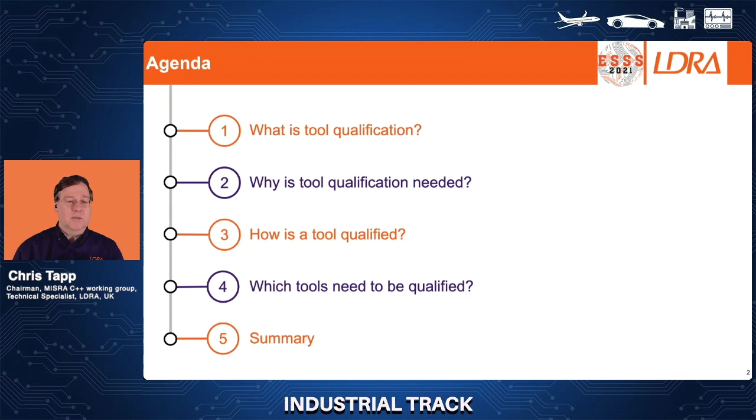So the first thing to understand is, what is tool qualification? Well, basically it is a process that's used to ensure that a tool is capable of doing the job that it claims to be able to do. In other words, it has to be at least as good as the manual processes that it will eliminate, reduce, or automate. The essence of tool qualification is really a process by which a user proves that the tools they are using are capable of properly performing its tasks.

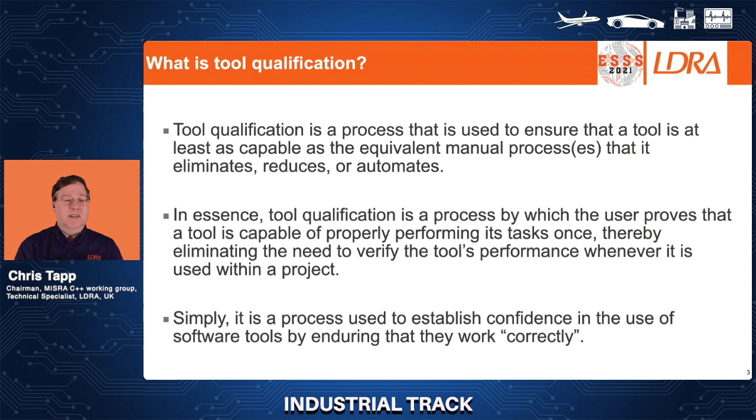The idea is that you do this once, which means you then do not need to verify the tool's performance whenever it's used within the project. So you do it once at the start of a project, and then you can assume that it is behaving as expected for the duration of the project. More simply, it's a process used to establish confidence in the use of the software tool by making sure that they work correctly or as they are expected to work.

So why do we need tool qualification? Well, really, it's needed for any project where software failure could have some serious consequences. That may be risk to life, financial consequences, or even just the reputation of a company. If you're producing a product that's widely circulated, you want to make sure that your name is seen in a good light. Some examples of this are within power generation, power distribution, machine control systems, building infrastructure, possibly something at the top of a building, a large mass used to maintain building stability in earthquakes, or some other project that has a high safety requirement associated with it.

It might also be necessary for development of systems that are not directly related to a product. For example, you may have a system used to program a medical device within a manufacturing facility. That also needs to be developed to an appropriate safety integrity level, at least as high as that of the product itself. You don't want to end up with a device having the wrong firmware in it, or having inappropriate calibration data loaded in it during manufacturing.

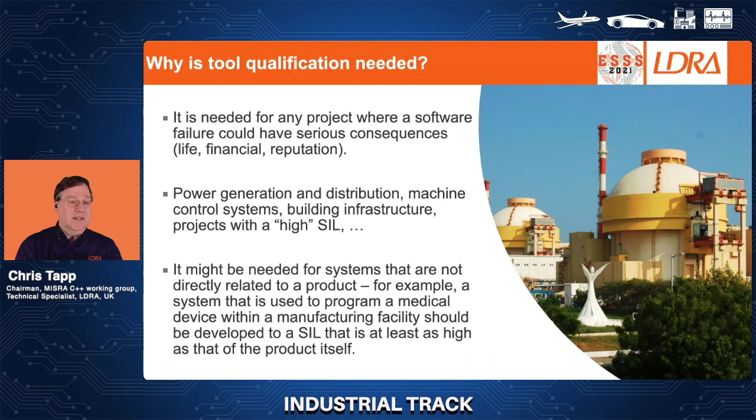So how are tools qualified? Well, as with most other things within high integrity software development, it is related to a process. And the process typically involves three phases.

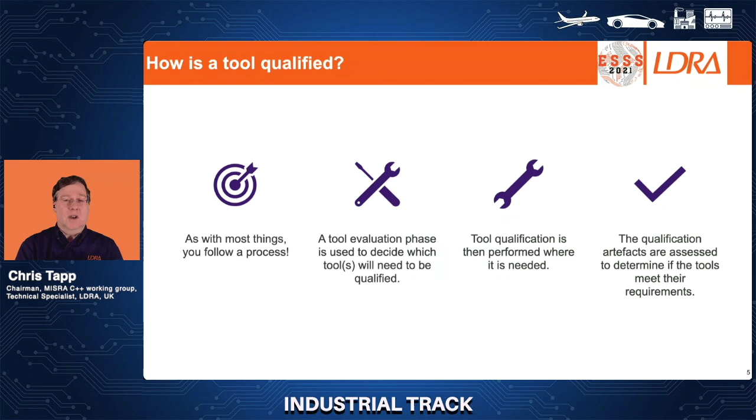First, a tool evaluation phase, used to decide which of the tools within your project need to be qualified. Then it moves on to a phase where the tools themselves are actually qualified, where the performance is measured and confirmed to be as needed. And there is also a review of the qualification artifacts produced during the process, where these are assessed to make sure that the tools are actually behaving as expected and that they are not going to compromise the project in any way.

So the process starts off with this tool evaluation phase, and the intent of this is to get an understanding of the tools and how they work within the development environment, and to see if there are any concerns that may be raised by their use.

So we start off by understanding what the intended purpose is. Why is the tool being used within the project? What's its purpose? We also look at the inputs and outputs of the tool. For example, it may be taking source code and producing reports, or it may be producing data files. So we need to understand what the workflow is associated with the tool.

And we also need to look at the environmental and functional constraints. In other words, where is the tool being used? How is it being used? And are there any restrictions that must be observed when the tool is being used for it to behave as expected.

The aim of this is really to evaluate the tools to decide if there is any possibility of them introducing errors into the software, or for them failing to detect errors that may be in the software that they are reasonably expected to detect and point out to the developers.

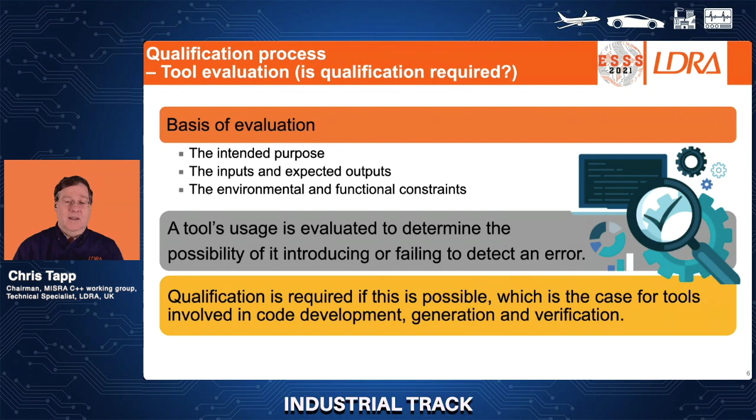Qualification is going to be required if there is a chance of any tool detecting, failing to detect an error, or introducing errors into the software itself. That's generally going to be true for tools involved in code development, any tools used for generation of code such as automatic code generation or compilers, and also any verification tools used to ensure that the product is meeting its functional and non-functional requirements.

Looking at the tool evaluation itself, there is a set of information that has to be collected to allow a tool to be evaluated, and that will include a use plan. In other words, how is the tool going to be used in the project? Do we understand how it's going to be configured? Do we understand the use cases that the tool will be applied to? And do all the developers understand how to use and run the tool on the data files that need to be checked or processed?

We also need to build up a list of the features, functions, and properties that are going to be used. In other words, we may have a tool with a lot more functionality than is needed within the project, so we need to understand which bits we are going to use and which we aren't, because there's no point in qualifying aspects of a tool if they aren't going to be used within the project itself.

It also helps if you can obtain a list of any known defects and workarounds that may exist within the tool. It's quite common for development tools to have some known issues, and the vendors will often publish a set of guidelines that say if you follow these guidelines, you will not run into these problems.

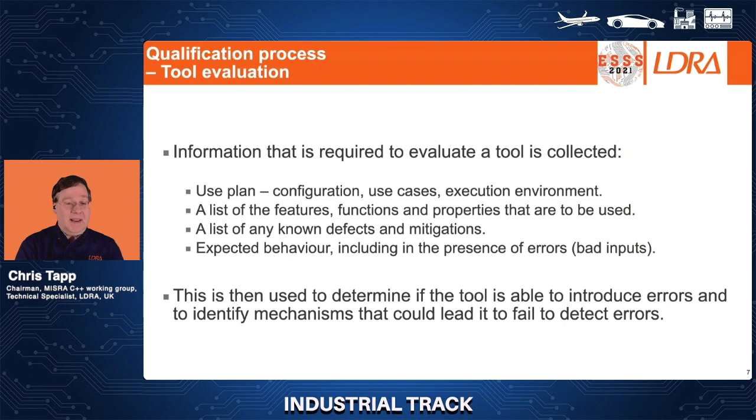The evaluation process itself is used to determine if the tool is able to introduce errors. If it is, we can then start to build in some mitigations to make sure that that doesn't happen. And we can also look at identifying mechanisms within the tools that could lead to them failing to detect errors.

In terms of the actual qualification, there are several methods used to qualify tools, ranging from fairly ad hoc, informal methods such as increased confidence from use of the tool. We can also look at evaluating the tool's development process -- has it been developed in a controlled way? We can then move on to formal validation of the tool's behavior, where the tool is actually run through standardized tests or other testing regimes to prove that it is behaving as expected.

We can also look at finding if the tool has been developed against a suitable standard, and whether there is any evidence to support that. It's possible within some projects that you may want to use more than one qualification method, and that's possibly a good idea if you're working at higher integrity levels, where you may want formal validation and also rely on any knowledge you have of using that tool in other projects, just to give you some extra confidence in its behavior.

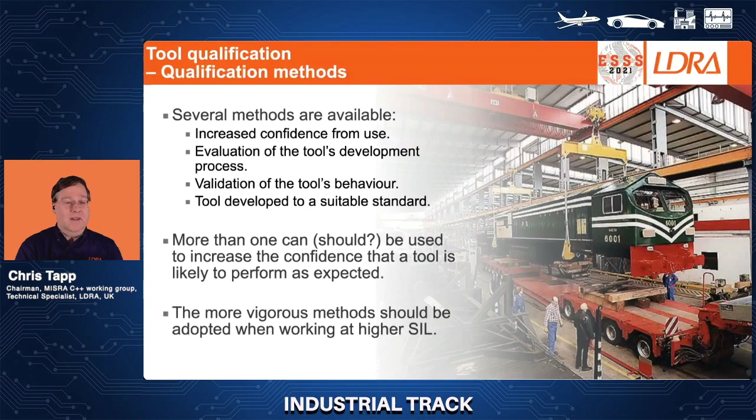So looking again at these qualification methods, if we're looking at increased confidence from use, what we're really looking at there is saying that the tool's been used in the past and it's been shown to work correctly.

It has to be used within a new project, within a similar use case, with a similar development environment, just to make sure there are no differences that might invalidate the confidence we have in the tool. It's important to understand that confidence from use can only be claimed as a valid qualification when the same version of the tool is being used and the functional constraints are the same.

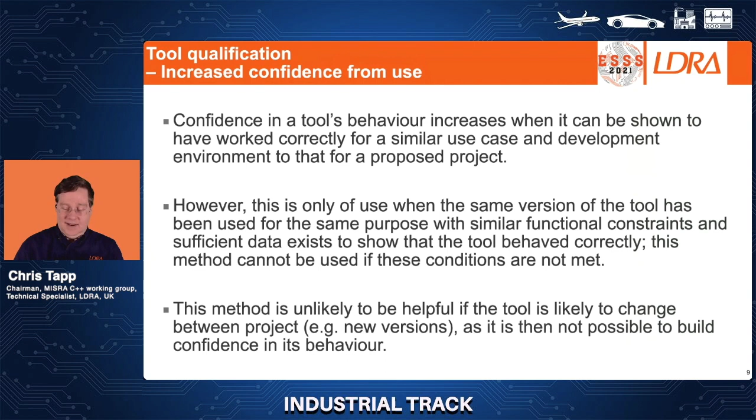That means there has to be some documentation or process artifacts to show it has been used and behaved correctly on a previous project. It's not going to be a particularly useful method if you're working with tools that change fairly often, in other words ones where new versions come out on a regular basis, unless you are able to use a previous version on a new project.

We can also look at evaluating the tool's development process. That's usually related to reviewing the development process used by the tool vendor, and that may include a quality audit of the vendor, but it's more likely to be based on reviewing artifacts or related documentation produced by an independent assessment body such as TUV. Within LDRA, we have TUV certification to show that our tools have been through an appropriate process to be used in safety-related projects.

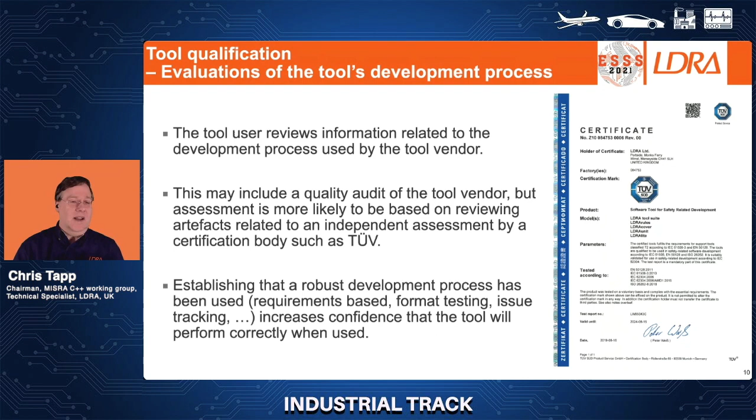The important thing is that however you go about this, what you're trying to do is establish that a robust development process has been used for the tool itself. So we're looking for something that's requirements-based, has formal testing, has issue tracking being used, and all of these things increase the confidence that the tool is likely to perform correctly when it is used within a project.

Moving on to some more formal methods, we're looking at validation of the tool's behavior. That's formal tool validation, generally required when working at higher integrity levels. The validation itself can be performed by the tool vendor, a third party, or even the end user of the tool. Independent or third party validation is generally preferred because it gives a little bit of independence between a claim that the tool works correctly and proof that it does do what it claims.

With compilers, it's fairly easy to find third parties that will either validate the compilers or even find compilers that have already been validated. But that's not the case for quite a few other tools, in which case it really helps if you're working with a tool vendor who understands that tool qualification is needed, and if they have processes or other support that can help with that qualification, it can make that work a lot easier.

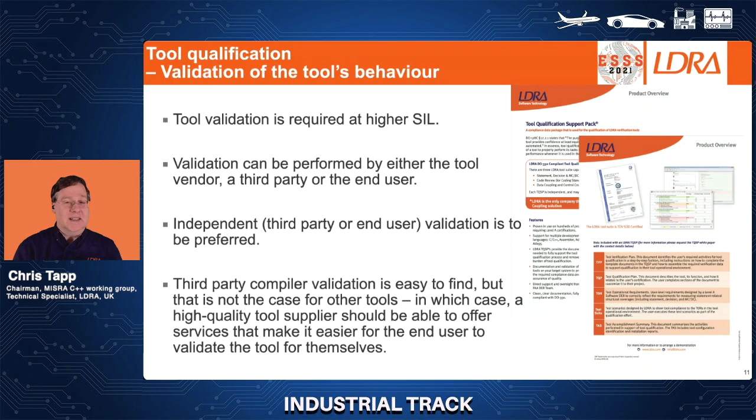You could also, in theory, look at trying to identify tools that have been developed to a suitable standard. Unfortunately, there aren't really any software or safety standards out there yet appropriate for the development of various software tools. So, for example, you're very unlikely to find tools that have been developed to whichever flavor of 61508 is appropriate to the sector you're working in.

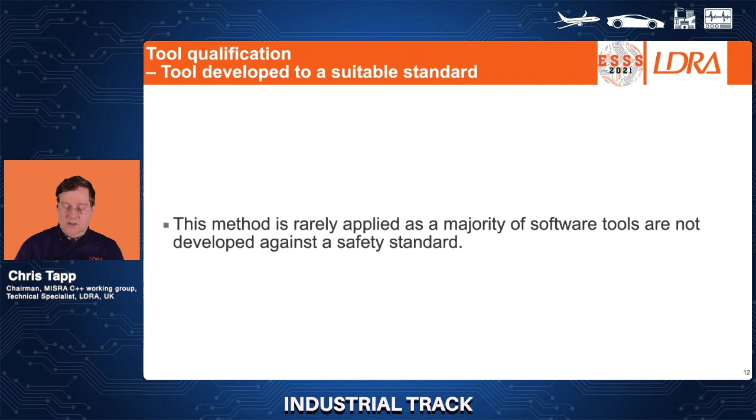So what scope do we have to look at with these tools? We have to think about whether all aspects of the tool have been qualified, or if there are some limitations. For example, if you're using a compiler, it may be that only subsets of the language have been qualified, and you have to make sure that when you use the compiler, you are using it in a way that is compatible with the subset that has been qualified.

Similarly, for static analysis tools, static analyzers quite often have many checks, but only a subset of them are needed. For example, if you're working with MISRA checking, you wouldn't necessarily need to validate all of the checks the analysis tool is capable of doing, but you would want to validate those related to MISRA compliance.

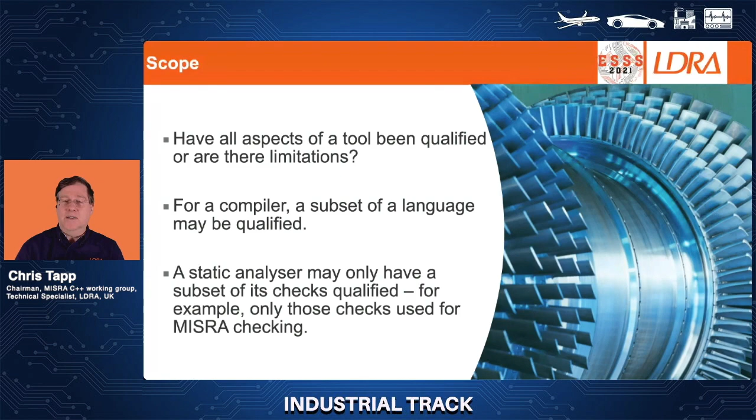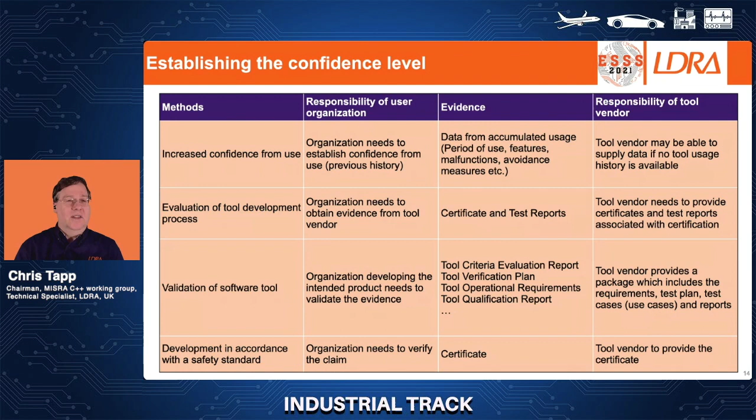I'm not going to go too much into the slide. This is really just showing that the various methods have different responsibilities, and evidence that's required to be gathered and pulled together to show that a tool can be considered as being qualified and that we're happy it's going to work as expected within our environment.

So which tools need to be qualified? Well, it depends. Firstly, tools are going to need to be qualified if there is a domain standard that requires it. Most sectors have a requirement to satisfy IEC 61508 or one of its derivatives, and what that means is that tool qualification is required in a lot of cases. That would include, for example, control systems within the nuclear industry, within machinery development, within the rail industry, within automotive, and so on.

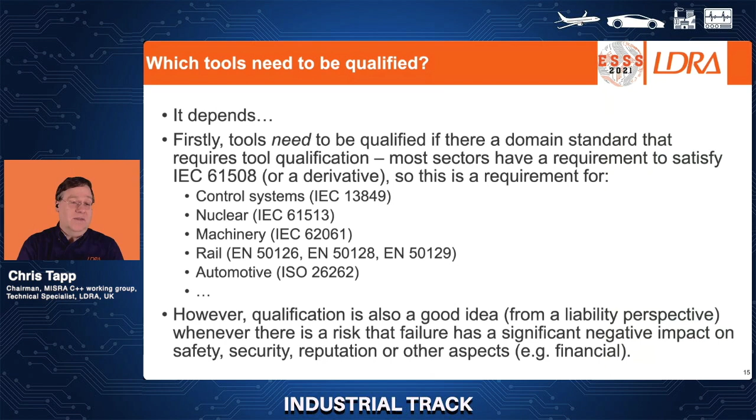However, qualification is also a good idea for protecting yourself from any liability claims whenever there is a risk that a failure of the software system is going to have a serious impact on product safety, security, or even just the reputation of the company.

So really just restating what was said earlier, tool qualification is there to demonstrate that the tool is at least as trustworthy as the activity that it is replacing. Software development tools and verification tools need to be qualified.

Development tools generate output that is actually part of the software, and therefore there is a chance they could introduce errors into the software directly. Verification tools themselves cannot introduce errors, but there is a chance they may fail to detect them. Typically, for example, if you're looking at a static analysis tool, you may be relying on it to detect instances of undefined behavior, and it's possible that it may fail to point one out. So you do want to make sure that the tools are qualified.

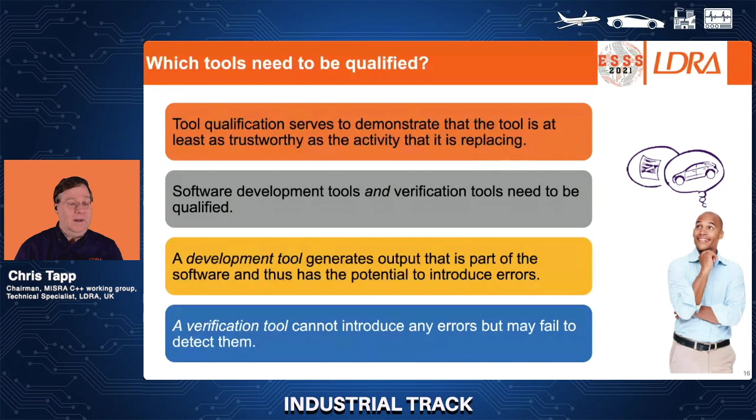Looking at the development tools, any tool that can have an effect on the behavior of the product software needs to be qualified. So obviously we have the compiler, and that will include the linker and any other software tools you use during the build process. That includes tools like CMake used to generate build files or anything else directly related to the build process. Modeling and other tools used for code generation, so Simulink or MATLAB or any of these other tools, they would all need to be qualified.

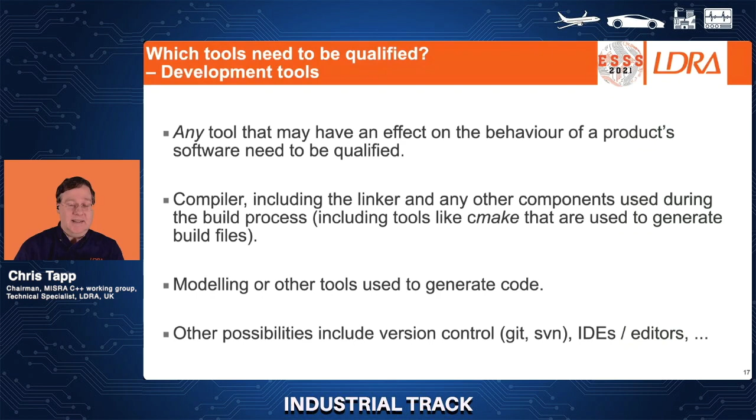And in theory, you should also look at other tools related to the software itself, so the version control, Git, SVNs, IDEs, editors, all these other things that could introduce defects.

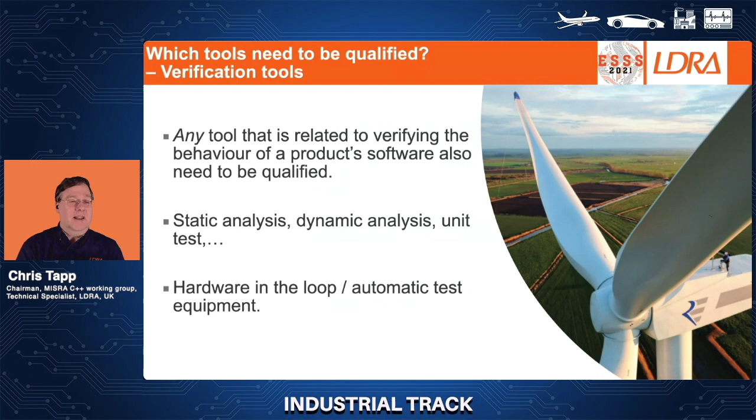When we're looking at the verification tools, we're concerned with any tool that's related to showing that the behavior of the software is as expected. They will also need to be qualified. That will include static analysis tools, dynamic analysis tools, unit test, and also possibly hardware in the loop or automatic test equipment where that is directly involved in running and capturing test results.

When should they be qualified? Well, as said earlier, they need to be qualified for each project, but you can use results from previous qualification activities provided that the use cases and constraints placed on the use of those tools are the same. That's really where the tool evaluation is useful. If the evaluation shows the use cases are the same as before, it's likely that if you use tools regularly within various projects, you already have the evidence that you need.

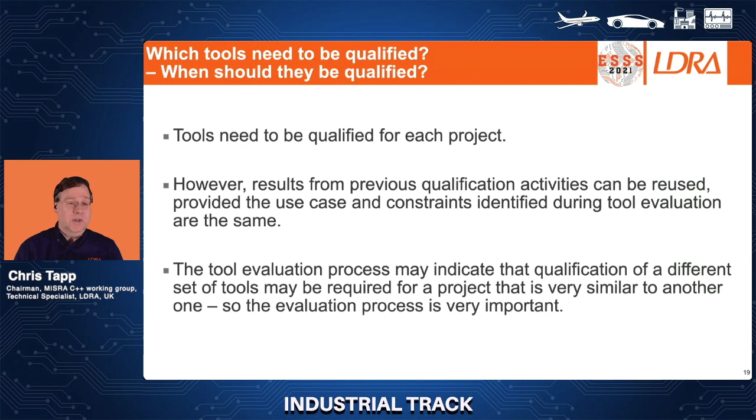It is also possible that the evaluation process may indicate that the set of tools you have to qualify for a project may be slightly different from a similar project. So the evaluation process is really very important. It shows what needs to be done, and it also helps to identify if it has already been done.

So just looking at a couple of very brief examples, within 61508 Part 4 identifies various classes of tools with these T levels. T1 are tools which have no impact on executable code. That does say that text editors are not considered to be

directly related and have no chance of introducing defects. I'm not entirely convinced. 61508 2010 is quite old. There are now a lot of editors, or more realistically IDEs, that can actually modify the code as you're developing it. For example, they can have quick fixes and automatically try to fix defects in the code. So there is a chance that they can edit the code in a way that is undesirable.

The T2 level is for tools which only impact verification activities, so that's your static analysis and other testing tools. And T3 are tools which can actually introduce errors directly, so that will be compilers and code generators.

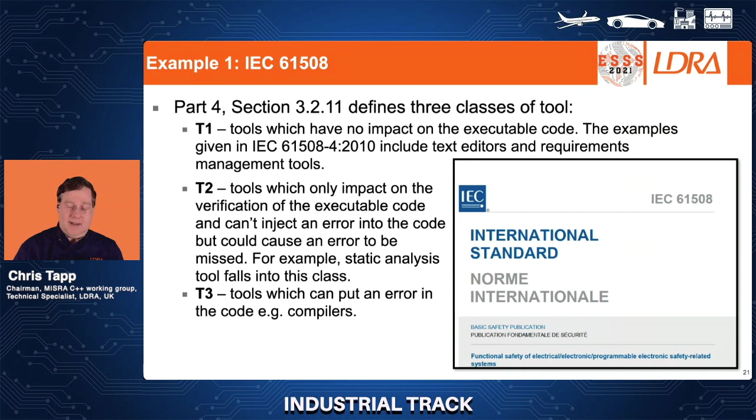It then requires that an assessment is carried out for the tools in classes T2 and T3 to determine if they can be trusted. We need to be able to prove this. We need to identify potential failure mechanisms and how that may affect the delivered software, and if there are mechanisms identified, we have to put appropriate mitigation measures in place to make sure that tools don't introduce defects.

I know it's not directly related to this session within ESSS, but one of the best cases to find more guidance on this at the moment is within the automotive ISO 26262 standard, where they have actually gone into quite a bit of detail about how the qualification of tools should be done.

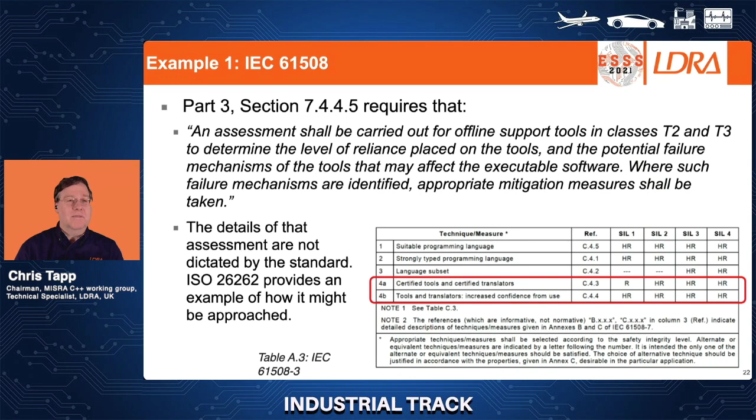And in fact, within 26262, they introduced these concepts of tool confidence level, which itself is derived from something they call tool impact and tool error detection ratings. Tool impact is basically saying, is there a possibility that malfunction of a particular tool can introduce or fail to detect errors? If it is, then we need to go through the qualification process.

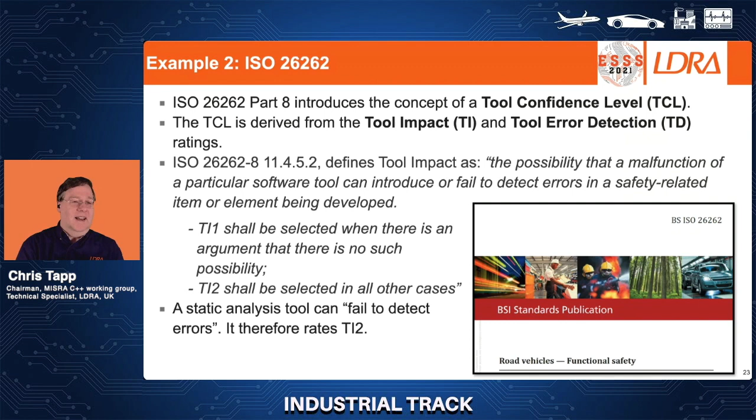Within 26262, a static analysis tool will be classified as a tool impact level of 2, which means that it would have to be qualified.

The detection rating is basically an estimate of the likelihood of a tool detecting any errors within itself or some other means. With categories that range from TD1, which means there's a high confidence that any tool error is going to be detected, to TD3, which means it's unlikely, so we have to worry about it.

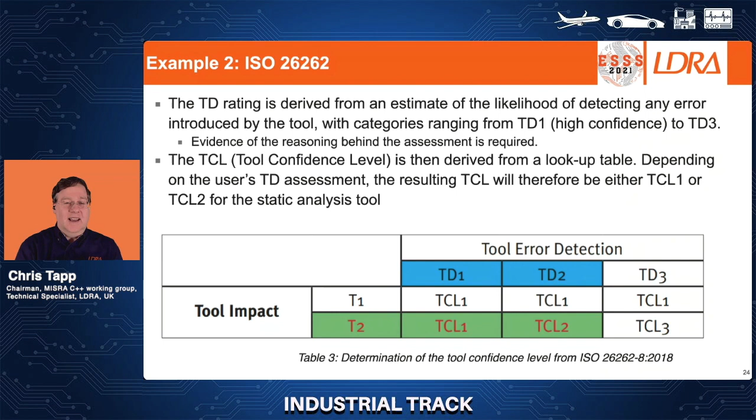The tool confidence level is then derived from various lookup tables within the standard, and depending on what the risks are, we can then assign one of these confidence levels to a tool. And then from that, we can see which qualification methods are likely to be most appropriate to it.

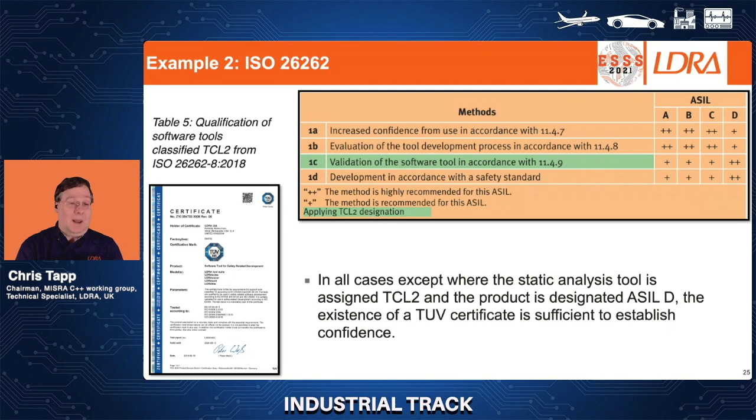So, for example, for a static analysis tool, unless it's assigned tool confidence level two and the product is designated as ASIL D, then the existence of a TUV certificate is going to be sufficient to establish confidence in that tool.

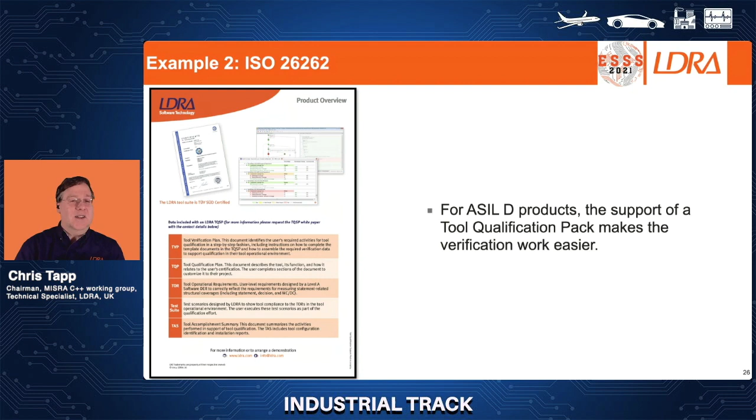If you're working at higher levels, for example when you're working at ASIL D, and you're actually going to want some formal tool qualification, as I said earlier, it does help if you're working with a tool vendor that has something like the LDRA tool qualification pack available to help make it easier for you to actually verify that tool and prove that it is working as expected.

So in quick summary, tool qualification helps to ensure that your product's safety, security, and functional requirements are satisfied. It will be required whenever there is a risk that a software defect could lead to a failure of a critical system. Any tool that is identified by tool qualification as being able to affect a product's executable code, either by injecting or failing to identify faults, needs to be qualified for use.

Tool qualification must follow a documented process, and as part of that you must produce a set of evidentiary artifacts to show that the process has been executed, and the documentation needs to record limitations in the scope of the qualification that results from that process.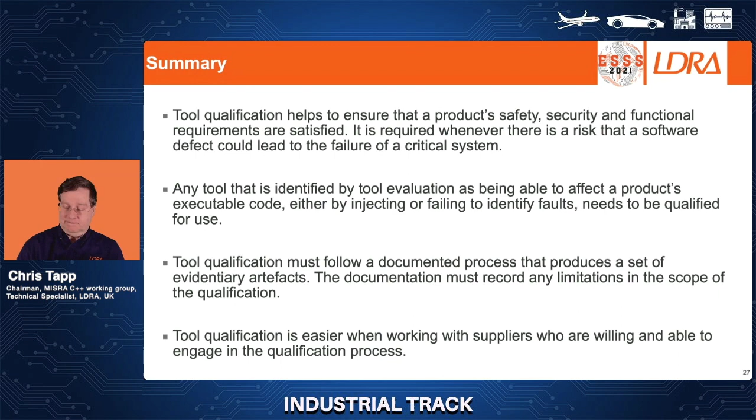Tool qualification is much easier when you are working with suppliers who are willing and able to engage in the qualification process itself. It can be tricky to do, especially for some of the more complicated tools, so it really does help if you've got a good set of vendor application engineers who can help you through that process.